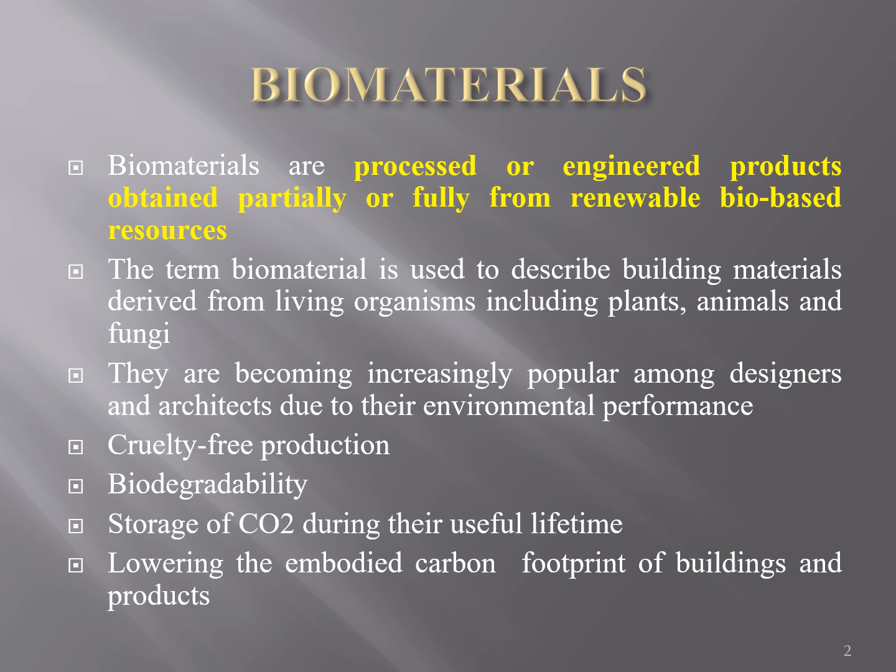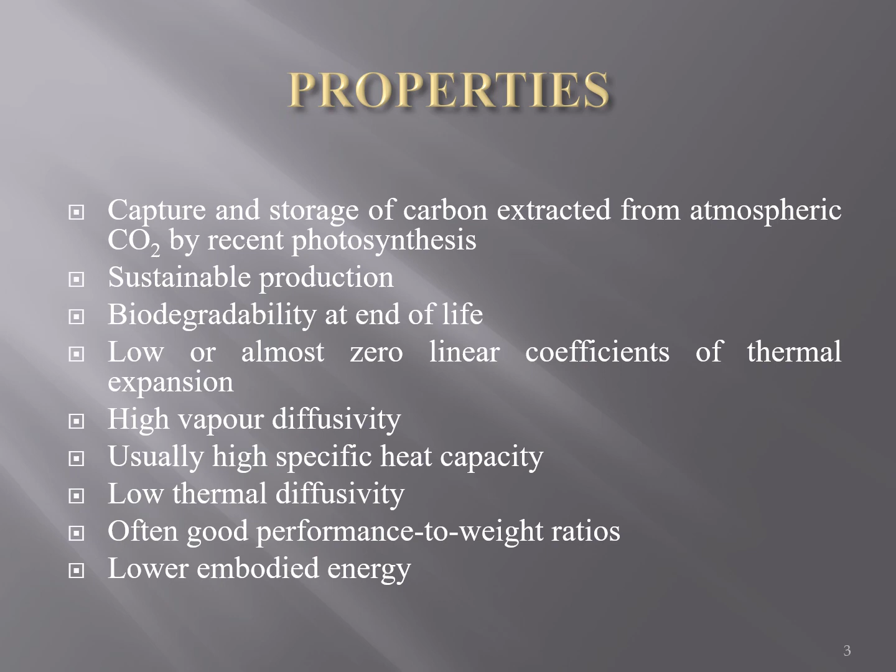Biomaterials have the potential to provide construction materials with benefits such as capture and storage of carbon extracted from atmospheric CO2 by recent photosynthesis, sustainable production, biodegradability at end of life, low or almost zero linear coefficient of thermal expansion, high vapor diffusivity, usually high specific heat capacity, low thermal diffusivity, often good performance-to-weight ratios, and lower embodied energy.

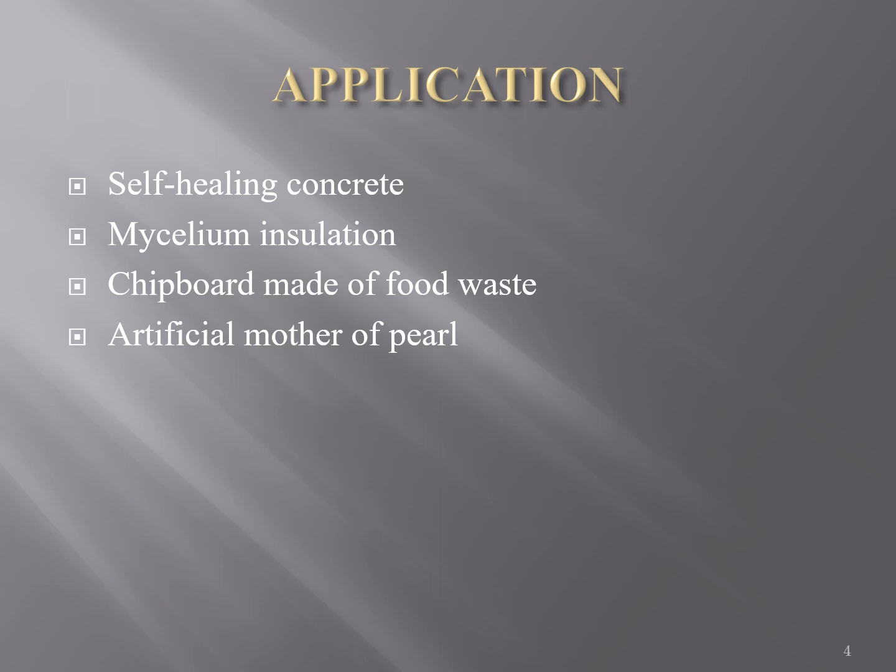Some applications of biomaterials in the construction industry are self-healing concrete, mycelium insulation, chipboard made from food waste, and artificial mother of pearl.

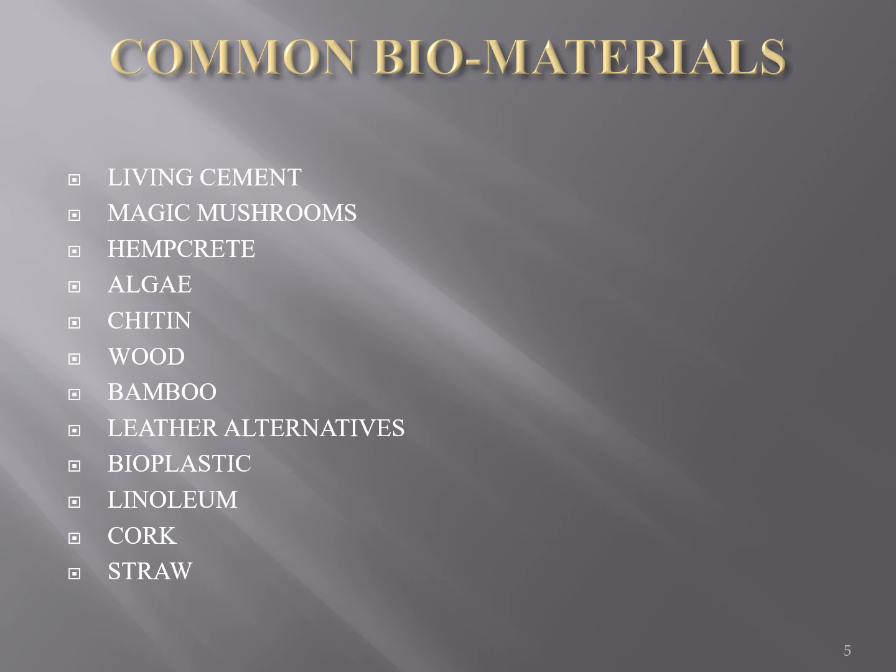Common biomaterials are being abundantly used in the construction industry in one form or another. As mentioned earlier, some biomaterials like wood are employed directly, while others are chemically modified to optimize material performance. They are obtained from a wide range of natural resources like animals, plants, soil, and industrial biotechnical processes. Now let us discuss some common biomaterials used in the construction industry: living cement, magic mushrooms, hempcrete, algae, chitin, wood, bamboo, leather alternatives, bioplastic, linoleum, cork, straw, etc.

First, living cement. Cracking in concrete is an accepted common phenomenon in concrete structures; however, cracked concrete may result in serious leakage and reinforcement corrosion issues. Extremophile bacterial spores are added to a standard concrete mix. When in contact with water, the bacteria multiply and start to produce limestone. Due to the formation of limestone, cracks are autonomously repaired, preventing leakage and protecting the reinforcement.

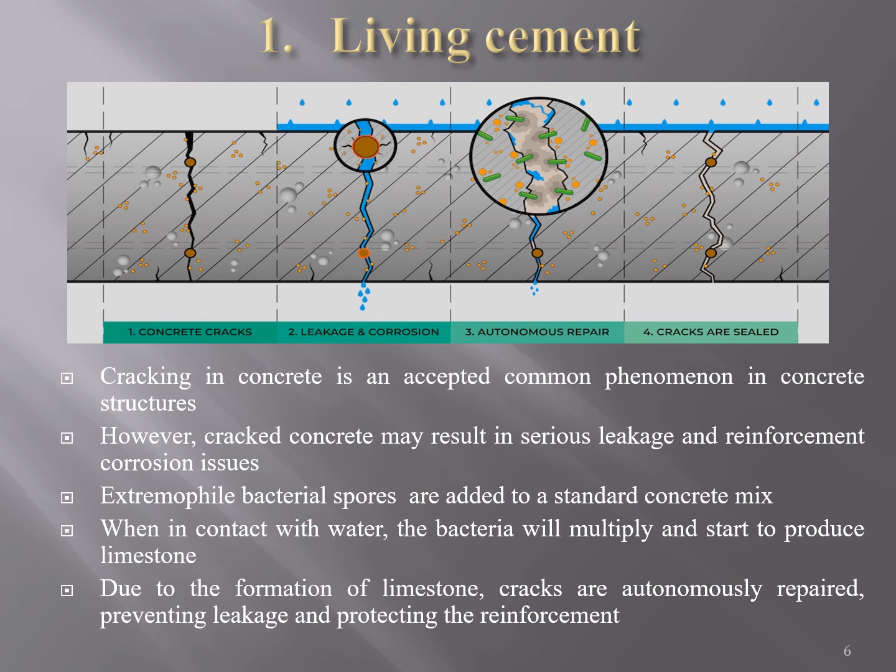The second one, magic mushrooms. Mycelium, which forms part of the root structure of mushrooms, is the vegetative part of a fungus made up of masses of branching, threaded shoots called hyphae that grow in soil. The material can feed on low-grade agricultural waste and sequesters carbon stored in the biomass as it grows. Various products include mycelium-based insulation panels, mycelium bricks, packing material, furniture, and leather-like fabric. Advantages of magic mushrooms include fire and pest resistance, usefulness for acoustics, and efficient thermal control.

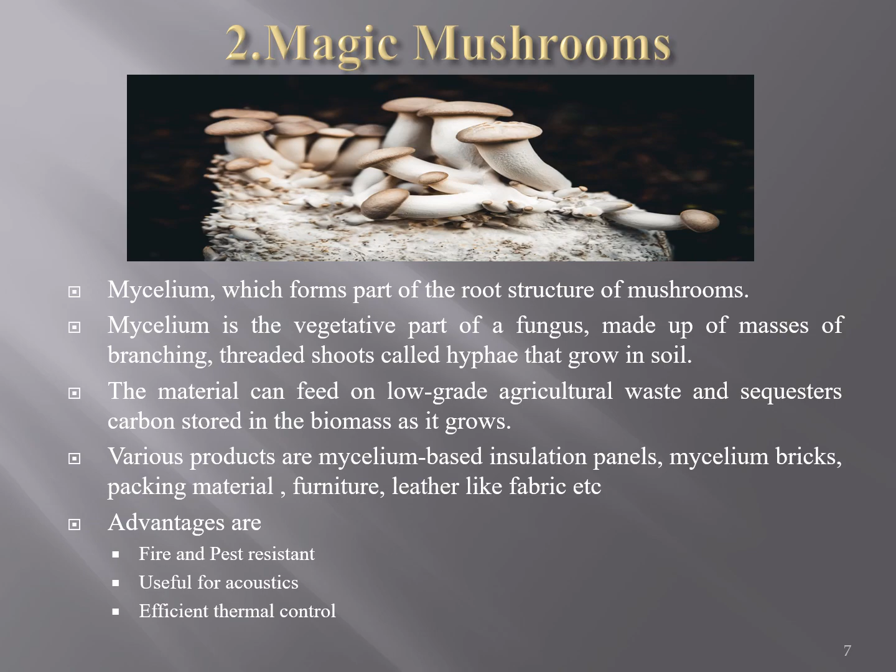The third one is hempcrete. Hemp is a type of cannabis plant grown for medicinal and industrial use. Hemp grows extremely quickly and is more effective than trees at sequestering carbon. The plant's strong, stiff fibers can be processed into commercial goods including paper, textiles, bioplastic, food, biofuel, as well as industrial and construction products. Architecturally, hemp is most often processed into hempcrete, formed from the woody inner part of the plant stem mixed with lime, water and sand, creating a material that offers excellent thermal and acoustic insulation while acting as a carbon sink.

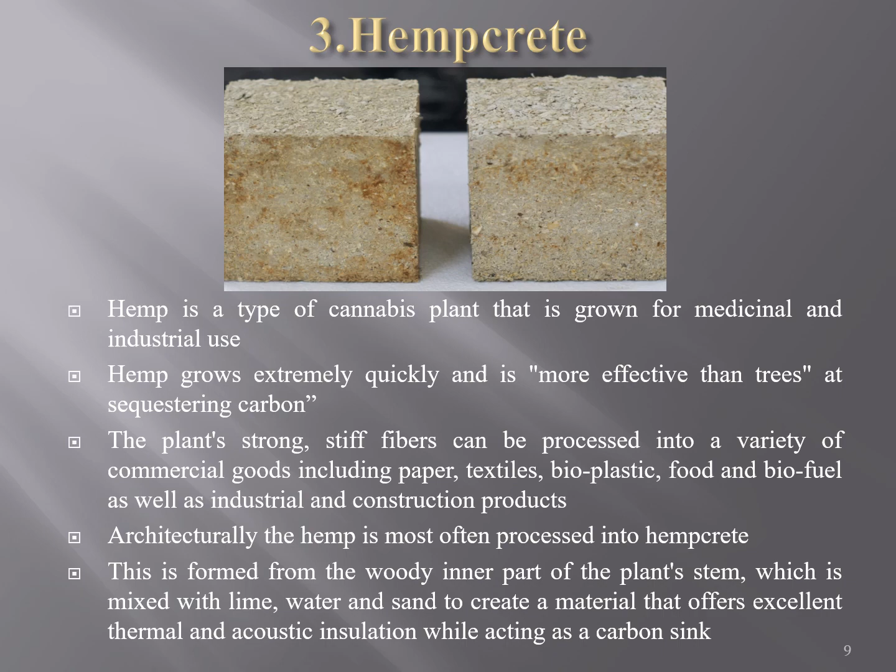And the fourth one is algae. Algae is an umbrella term for a group of photosynthetic organisms that mainly live in water. This includes seaweeds and kelp, which are the most important sources of oxygen in water and together are responsible for storing and sequestering more carbon than land plants.

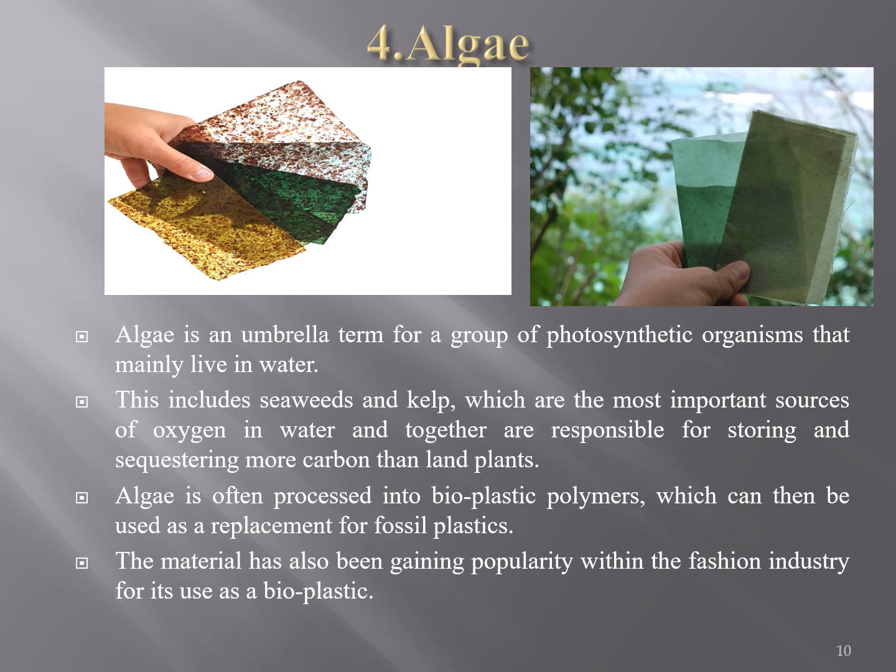Algae is often processed into bioplastic polymers which can then be used as a replacement for fossil plastics. The material has also been gaining popularity within the fashion industry for its use as a bioplastic.

And the fifth one is chitin. Chitin is a fibrous substance that forms the exoskeleton of crustaceans and certain insects as well as the cell walls of fungi. The material is the world's second most abundant biopolymer. But to use chitin, it must be chemically extracted before being processed into a usable material. Due to the difficult extraction process, commercially available versions of chitin such as chitosan are typically expensive.

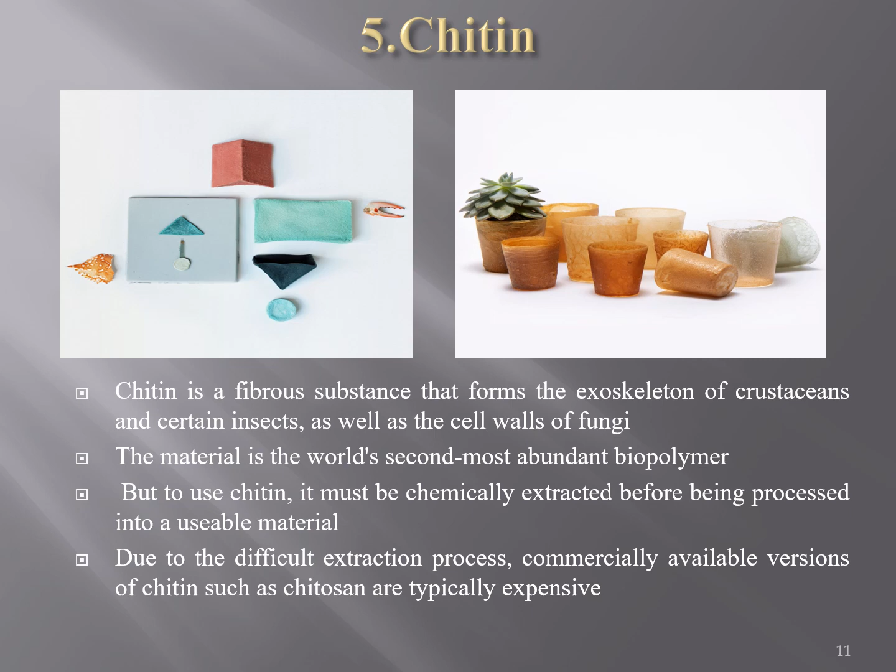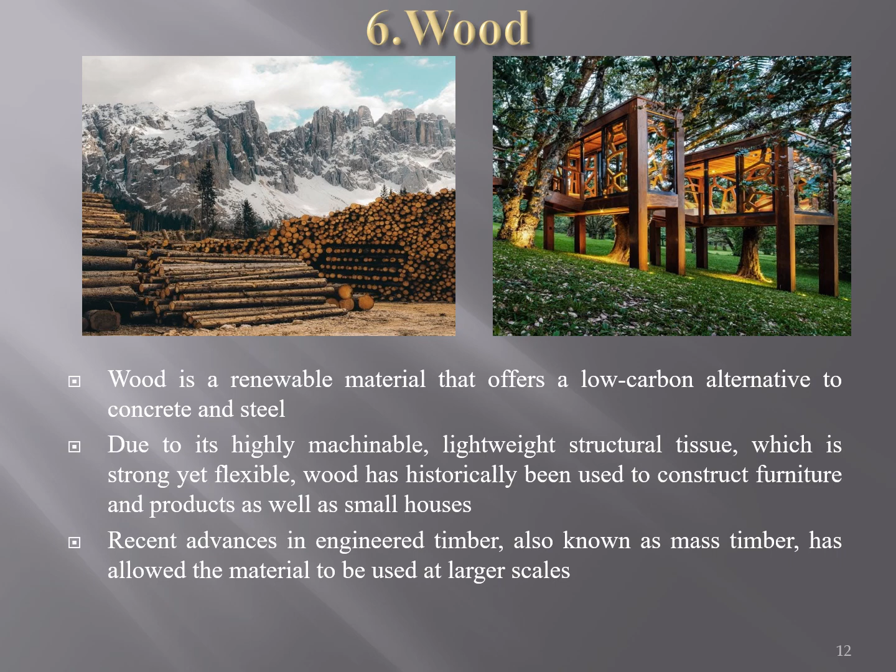And the sixth one is wood. Wood is a renewable material that offers a low carbon alternative to concrete and steel. Due to its highly machinable, lightweight structural tissue, which is strong yet flexible, wood has historically been used to construct furniture and products as well as small houses. Recent advances in engineered timber, also known as mass timber, has allowed the material to be used at larger scales.

Next one is bamboo. Bamboo is the fastest growing plant on the planet, making it both affordable, rapidly renewable and capable of sequestering a large amount of carbon. Its canes lend themselves to creating light, flexible structures that can resist natural disasters such as earthquakes and hurricanes.

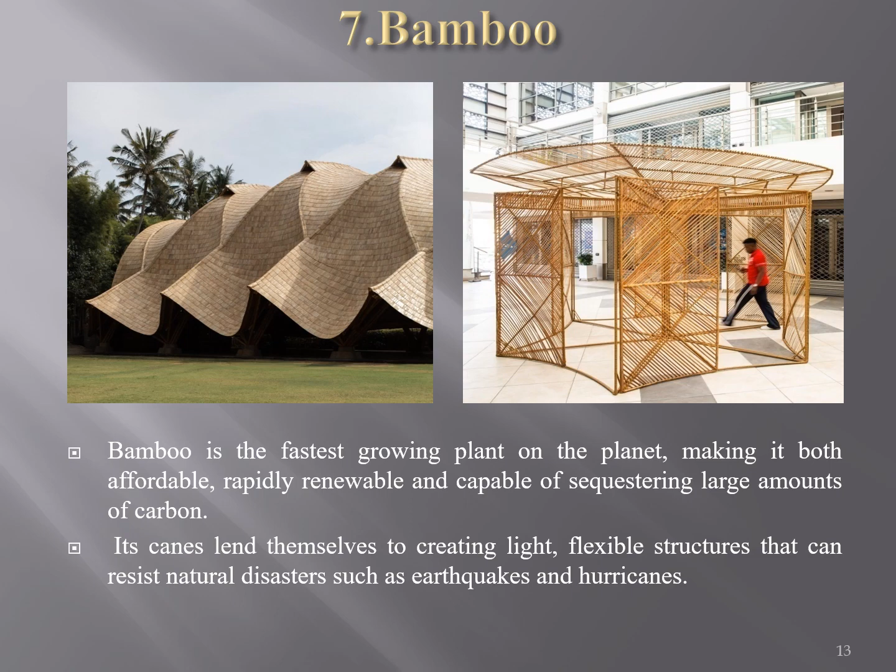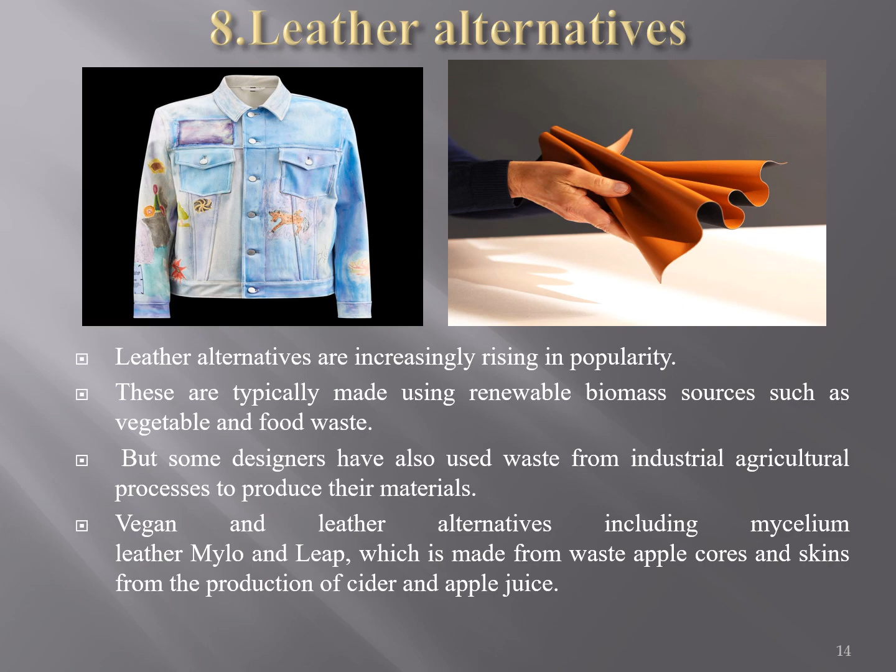Leather alternatives are increasingly rising in popularity. These are typically made using renewable biomass sources such as vegetable and food waste. But some designers have also used waste from industrial agricultural processes to produce their materials. Vegan leather alternatives include mycelium leather, Mylo, and Leap, which is made from waste apple cores and skins from the production of cider and apple juice.

Bioplastics are polymers derived from biological and renewable sources, as opposed to plastics made from fossil fuels. Polylactic acid, or PLA, is the most common bioplastic. It is typically made using cornstarch or sugarcane. PLA is widely used as printable filament in 3D printers, where PLA filament is fed through the printer and melted at high temperatures to create a malleable substance that is printed into the desired form.

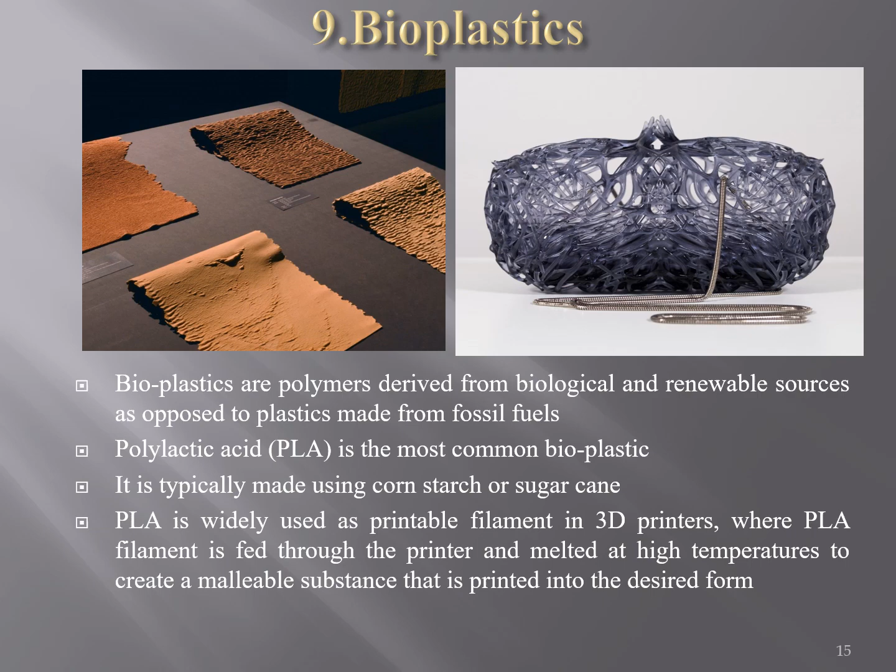Linoleum is a biodegradable material made from plant-based materials including linseed oil, pine resin, cork dust and sawdust. The material is typically used as a floor covering due to its durable and resistant characteristics. The material was first patented in 1860 when rubber manufacturer Frederick Walton discovered linseed-based paint formed a tough and flexible film on its surface. Most linoleum today is derived from linseed oil, which is extracted from flax seeds and then mixed with materials such as cork and wood dust.

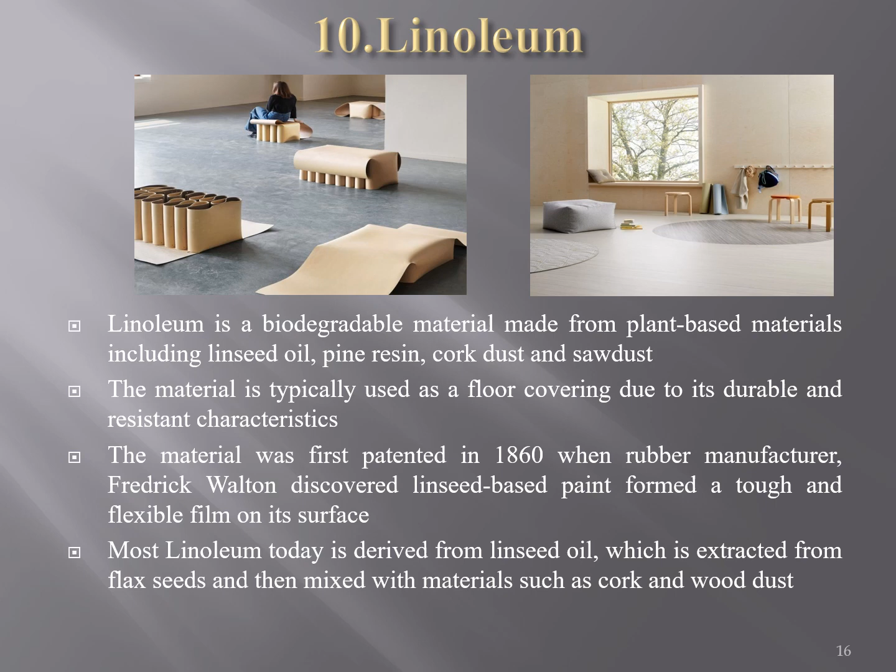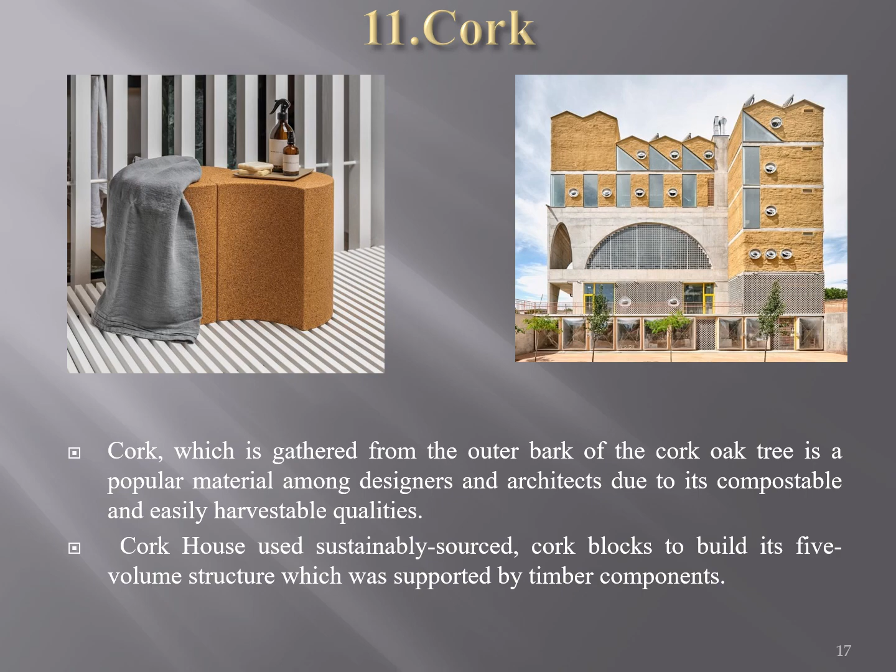Cork, which is gathered from the outer bark of the cork oak tree, is a popular material among designers and architects due to its compostable and easily harvestable qualities. Cork House used sustainably sourced cork blocks to build its five-volume structure, which was supported by timber components.

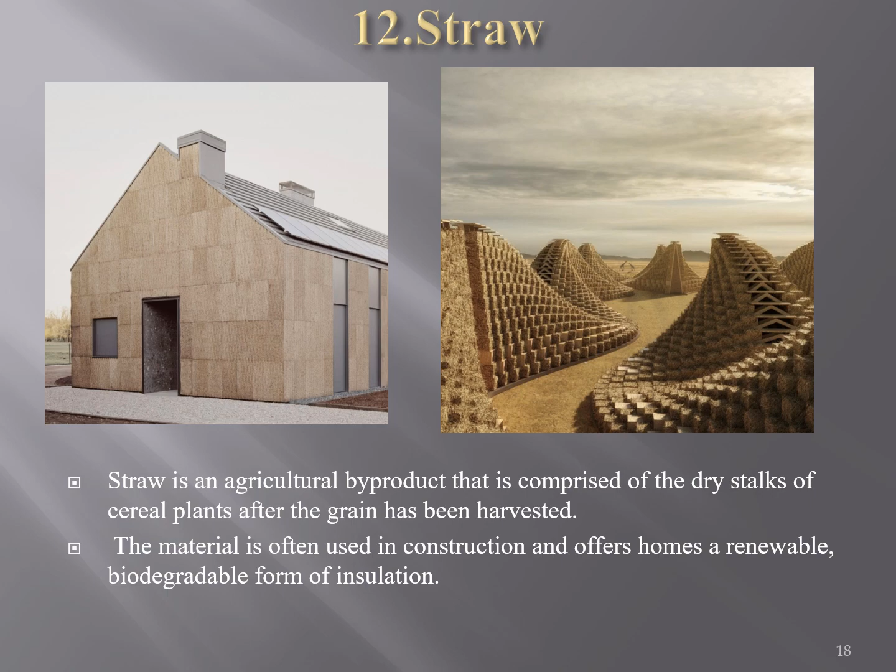Straw is an agricultural byproduct that is comprised of the dry stalks of cereal plants after the grain has been harvested. The material is often used in construction and offers homes a renewable, biodegradable form of insulation.

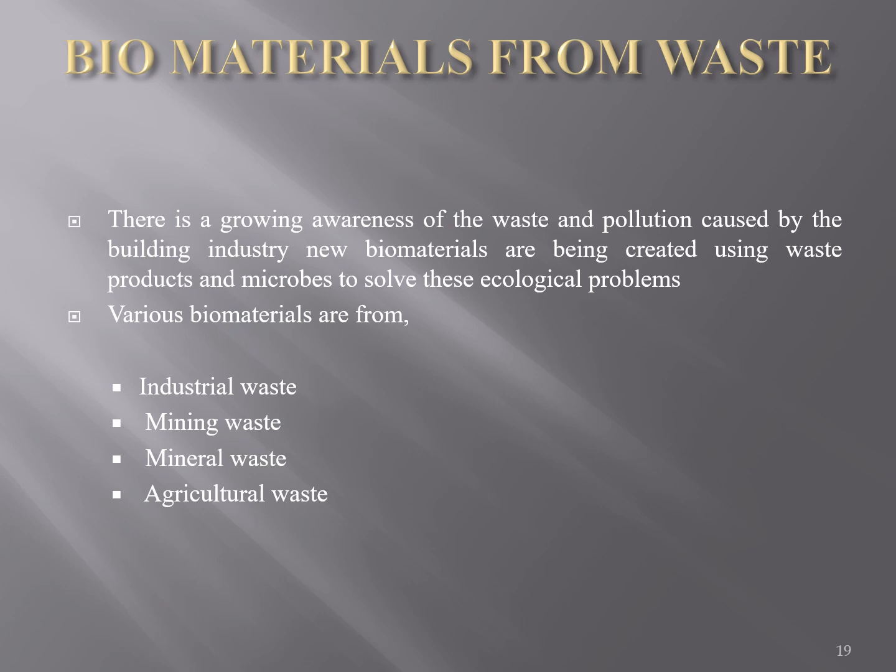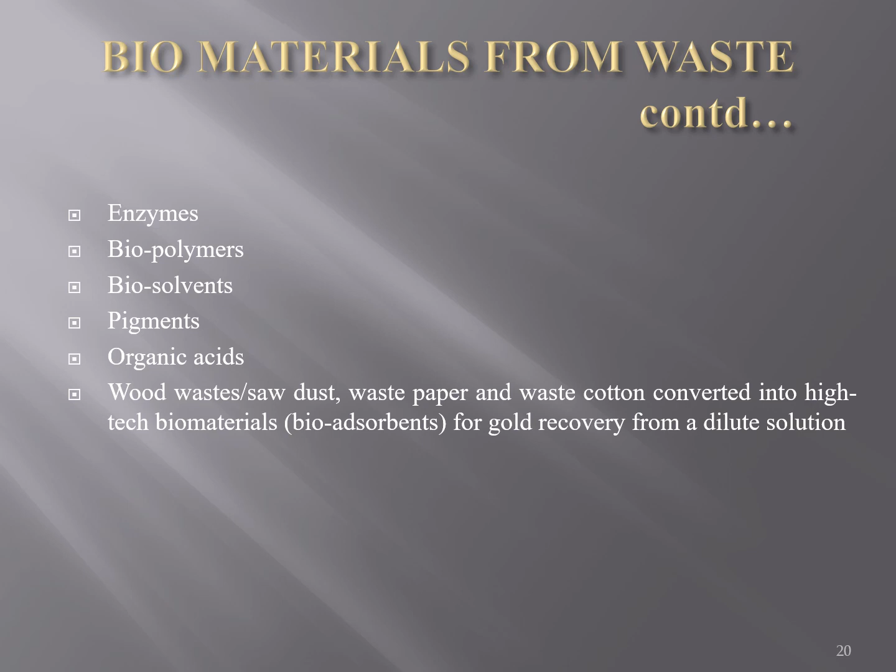There is a growing awareness of the waste and pollution caused by the building industry. New biomaterials are being created using waste products and microbes to solve these ecological problems. Various biomaterials come from industrial waste, mining waste, mineral waste and agricultural waste. Enzymes, biopolymers, biosolvents, pigments, organic acids, wood waste or sawdust, waste paper and waste cotton converted into high-tech biomaterials or bioadsorbents for gold recovery from a dilute solution are some of the biomaterials derived from various waste products.

Sustainability calls for the building of future infrastructure that meets the needs of the present without compromising the ability of future generations to meet their own needs. Bio-based materials provide a solution to our environmental problems. They produce fewer greenhouse gases and far less toxic pollutants over their lifespan as compared to their synthetic counterparts.

One of the key strategies for green sustainable construction is the use of reusable and sustainably managed biomaterials and finishes made from agricultural waste and other byproducts. Biomaterials also provide a solution in terms of their biodegradability, which is a major concern. These bioproducts eliminate waste production and hence solve the waste dumping issue.

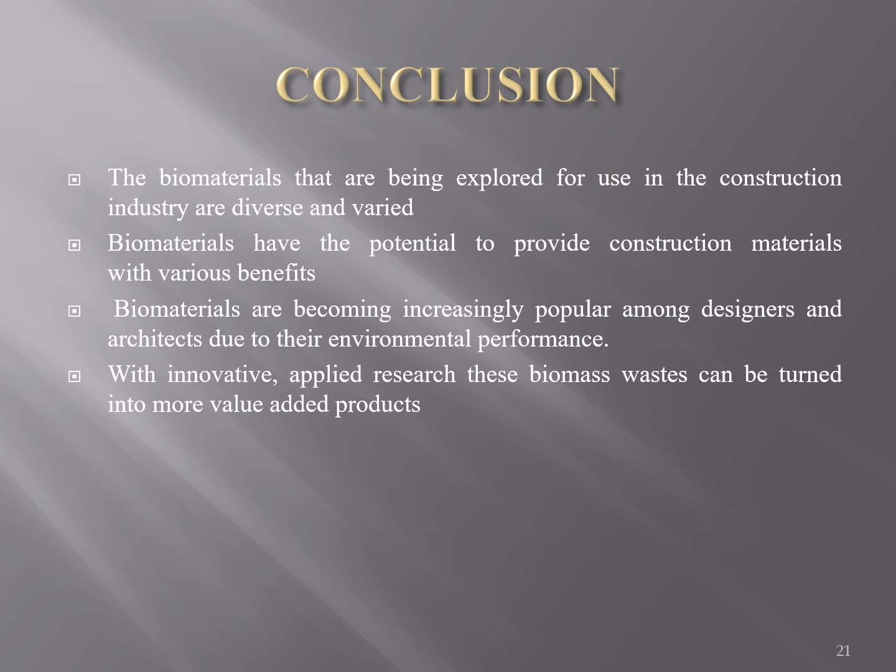So it can be concluded that the biomaterials being explored for use in the construction industry are diverse and varied. Biomaterials have the potential to provide construction materials with various benefits. Biomaterials are becoming increasingly popular among designers and architects due to their environmental performance. With innovative applied research, this biomass waste can be turned into more value-added products. Thank you.